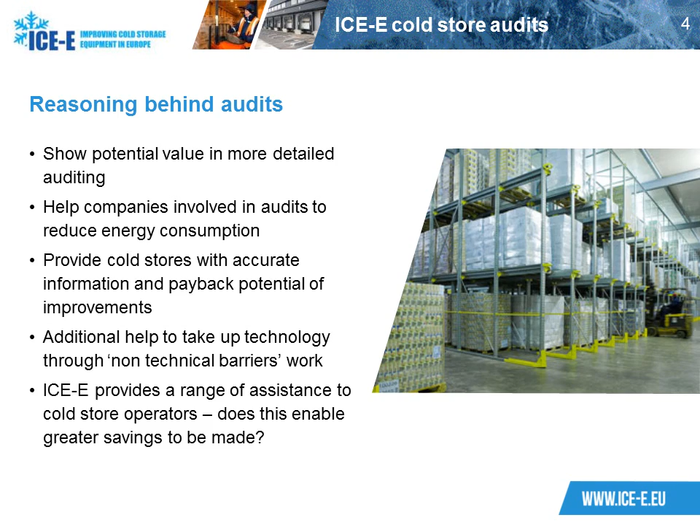In terms of the information that was collected from the audits, all the participants in the audits could remain anonymous, but they did all agree that we could use the information for future work. And so we used that information for a number of different other initiatives, such as using information in case studies to show advantages of installing energy efficient equipment. We used it to validate the mathematical models and the web-based tools.

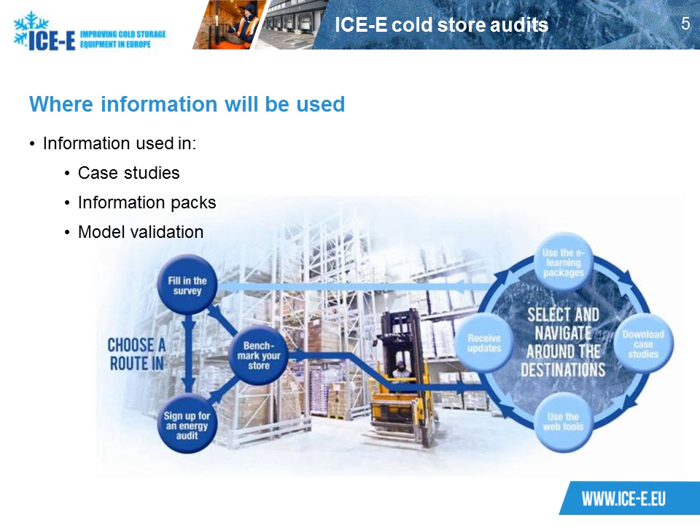We also used it in the info packs because we had a range of different information that was relevant to cold store operators, so that we could use it to make sure the info packs were relevant to those users. Also we used it in the e-learning packages to make sure that the information we were providing was relevant to cold store operators.

In terms of the auditing process, we did 2 things. We assessed the heat loads on the store and then looked at the efficiency that heat was extracted. So we measured or calculated transmission, infiltration, lights, fans, people, machinery and food as heat inputs, and then we looked at the efficiency that heat was extracted by the refrigeration system and calculated either a coefficient of performance or a coefficient of system performance.

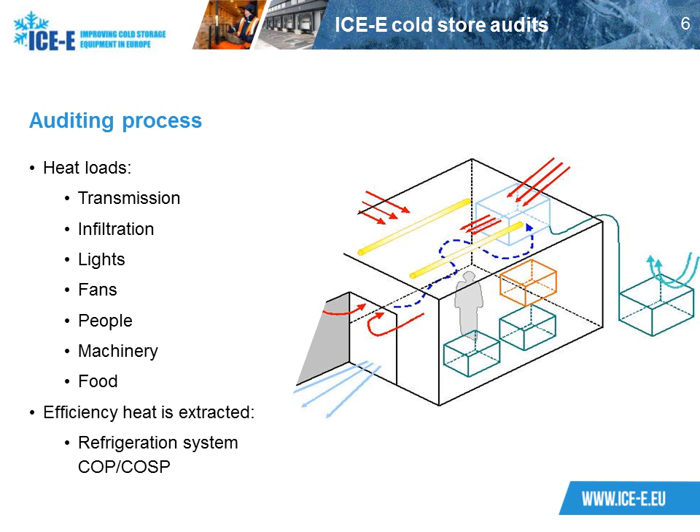In terms of what we measured, sometimes we were able to use the logging system at a cold store, but more usually we installed our own kit to measure temperatures, pressures and energy around the refrigeration plant. Typically we measured compressor suction and discharge temperatures and pressures, evaporator saturated and suction temperatures, air on and off to the evaporator. Also power used by the compressors, fans, lights, defrosts, forklift charging if it was available. We also looked at the heat loads from people, forklifts, infiltration, transmission and food.

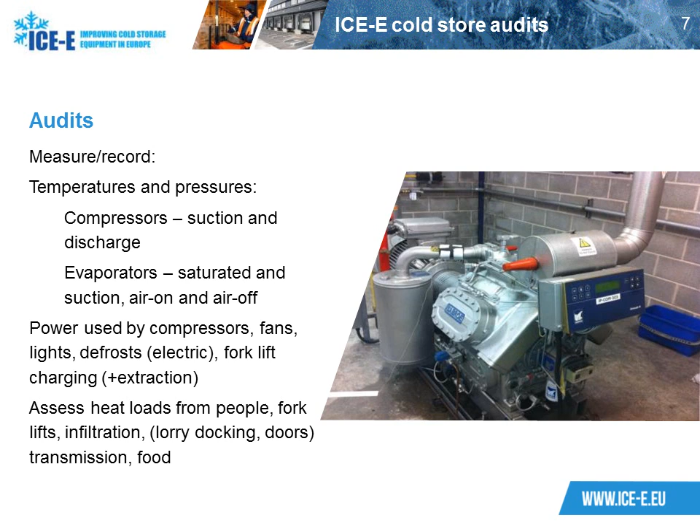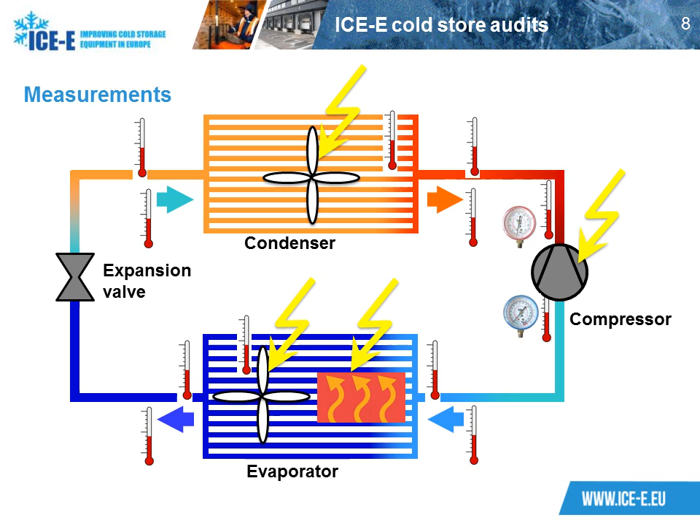So you can see in this picture where we measured the temperatures shown using the thermometer and pressures shown using the gauges, and the energy we measured at the fans, the compressors around the refrigeration system.

So in terms of the results from the audits, we divided the issues that we found in each of the audits into generic areas. So we divided it into areas such as subcooling, superheat, insulation, defrost, lighting, and this is the results that we came up with. You can see that no one issue tended to dominate, that we tended to have a lot of issues that had an impact across all of the cold stores.

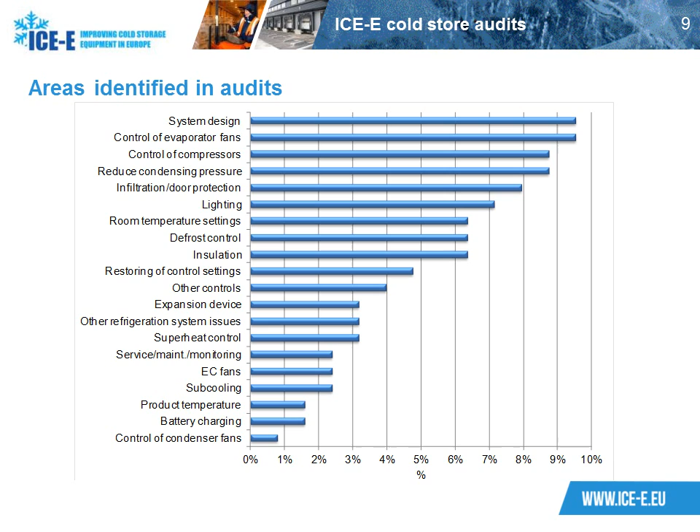The most highly rated were system design, control of evaporator fans, control of compressors, condensing pressure, infiltration and lighting. But all the issues had some impact, and some of them had quite high energy impacts.

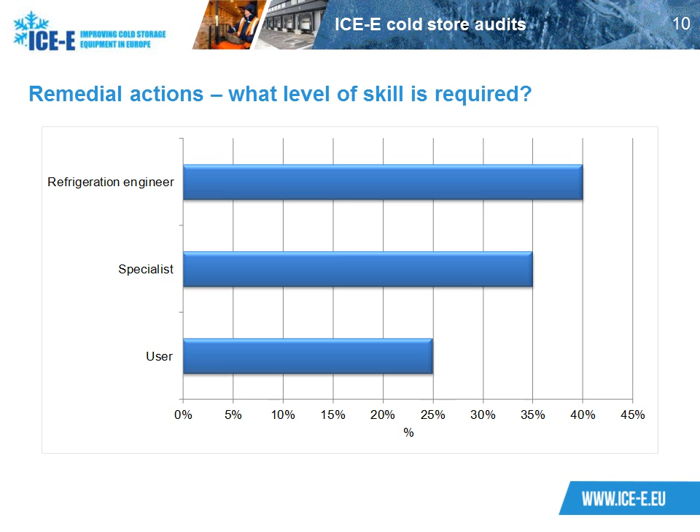In terms of the skill required to be able to remedy these actions, we divided it into 3 areas. There's some aspects of the energy saving initiatives that could be improved by the user. There's some that require a refrigeration engineer and some that require a specialist. And you can see that the user themselves can actually solve about 25% of the issues with just some training, the type of information that was provided as part of the ICE-E project.

There were really 3 levels. There were the simple options that the cold store manager can solve. These are things like door opening, lighting, fans and transmission. For example, they could use the ICE-E simple or complex model to do some of these calculations.

There's more complex options which a refrigeration engineer might be required to implement. These are things like controlling superheat, subcooling, leakage of refrigerant. And these are things that could be carried out on a reasonably regular audit by a refrigeration engineer to check that these things are still right and don't need any adjustment.

You then come on to areas that really a skilled analyst, a specialist, needs to deal with. These are more detailed issues dealing with controls, efficiency of components, and often you need a reasonable level of data recording, something similar to what we did within the audits.

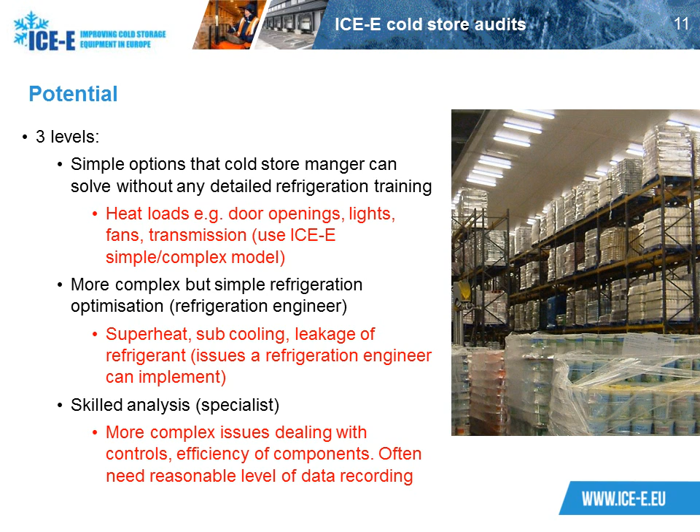In terms of efficiency, we actually found there was a huge range of efficiency within the stores that we audited. This tends to corroborate previous work where we found there was potential to reduce energy by often up to 60% in cold stores. However, one of the things we found is that the options are not necessarily generic, they're often specific to a facility.

And so, although we tried to provide some general advice from the audits, and to a certain extent we were able to, we weren't able to provide, for example, a list of 3 things that you must do in all cold stores. The audits showed that we could save up to 72% on some stores. Some stores there were very low savings.

Typically we were saving 20 to 30% of the energy. And the paybacks on the investments that were suggested were often less than 1 year. A lot of the paybacks were in several months.